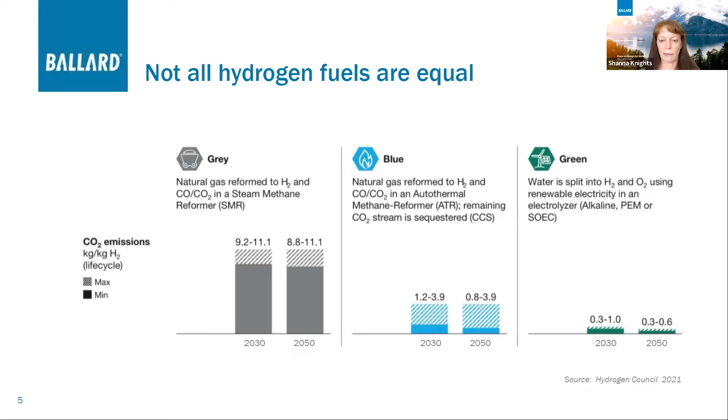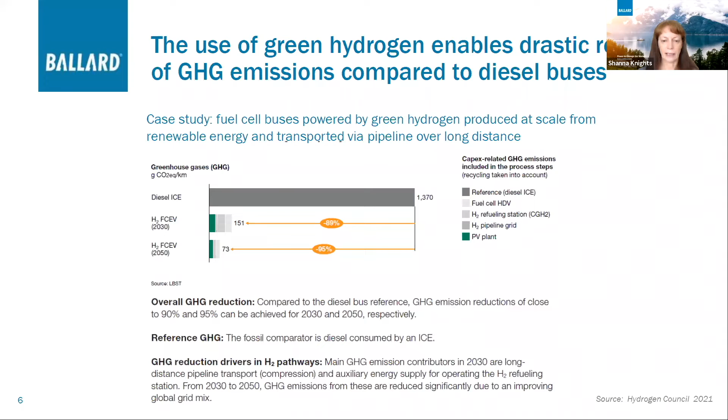From 2030 to 2050, the impacts go down further, and that's based on some expected improvements in the compressor to move the hydrogen through the pipeline and some auxiliary energy supply for operating the hydrogen refueling station.

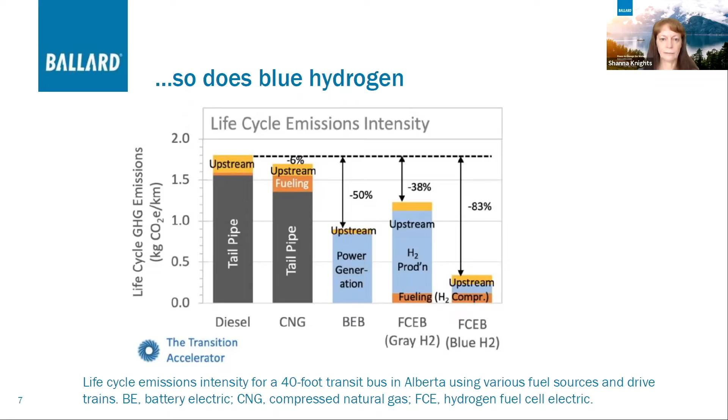Longer term, we hope that the grids can be cleaned up and that we'll have both battery electric buses and fuel cell buses have the significant impact that we all know that we need, and both will have drastic reduction. So just looking a little bit more at the complete life cycle.

We want to look at not only the operational phase of the bus that I've just been talking about, but the emissions generated during the production of the vehicle, including the fuel cell engine and batteries, and the end of life. What happens to it after it's operated?

So we call these different scopes of emissions. In producing your fuel cells or your battery, you have your scope 3, which is indirect greenhouse gas emissions that result from firms' operations when they're producing those. We have the operational emissions, which includes emissions for transmission from the grid, for producing your hydrogen, for producing your electricity, and no scope 1 emissions from actually operating your vehicle.

And end of life, again, it's scope 3, and here again it's indirect, but it's what happens to the vehicle, what happens to the engine after it's been operating and it's no longer producing enough power. Do you just have to throw those into the waste, or can they be recycled or reclaimed?

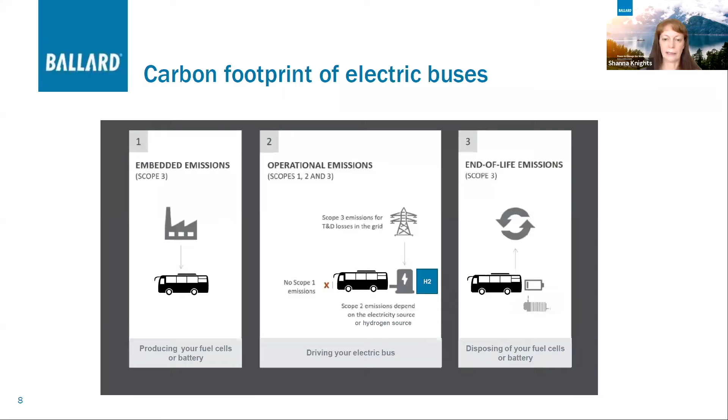Ballard makes fuel cell power units. We've gone into a lot of detail, and this is something we're going to be focusing on a lot, making sure that we know what the environmental impact is of our fuel cell engine and how we influence and reduce it.

Most of the components within a fuel cell stack are either graphite materials, so carbons, or metals, basic metals like aluminum, steel, and precious metal in the form of platinum. There's very little range of more exotic metals and materials like you'd find in batteries, for example, so it's relatively simple in terms of the materials produced.

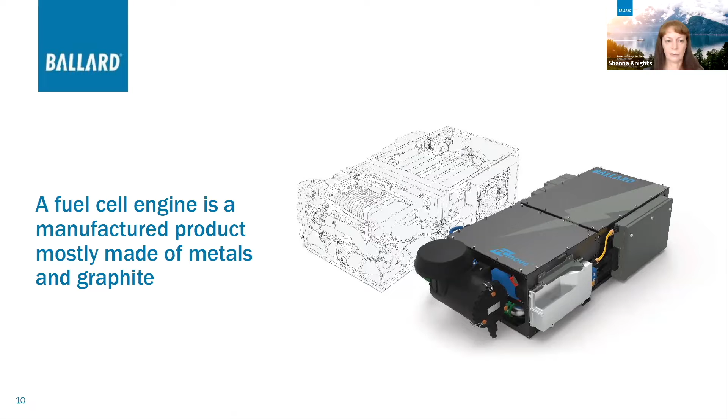What we've been working on over the past couple of years is really making sure we understand our greenhouse gas footprint of our products. We've done life cycle analysis from cradle to gate, from the production of our products until we ship it out. That includes looking at extraction and processing of raw materials, manufacturing and assembly of components, upstream transport, and manufacturing and assembly of the power module at Ballard's facilities.

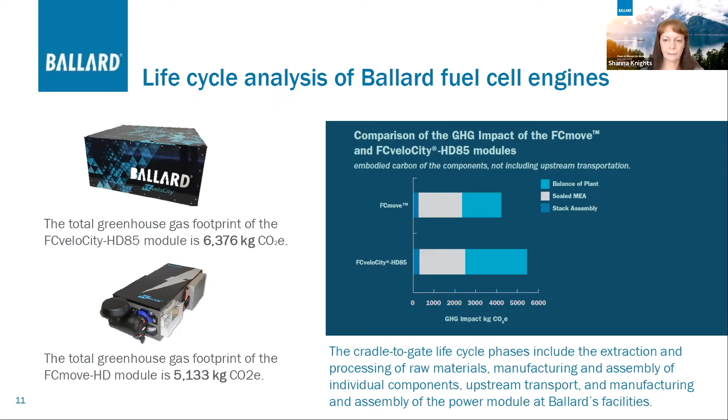Platinum is a mined material, and the mining of it currently has a significant greenhouse gas impact, but mines are starting to look at how they can reduce their impact, implementing the use of fuel cells or battery vehicles. Additionally, this analysis assumes no recycled platinum. We do recycle our platinum, and eventually we have to look at including that in our analysis, but for this first run we didn't include it, so that will reduce the platinum impact as well. When we make decisions on where to source our platinum, we can start to look at its greenhouse gas impact, and whether it's being mined or recycled sustainably.

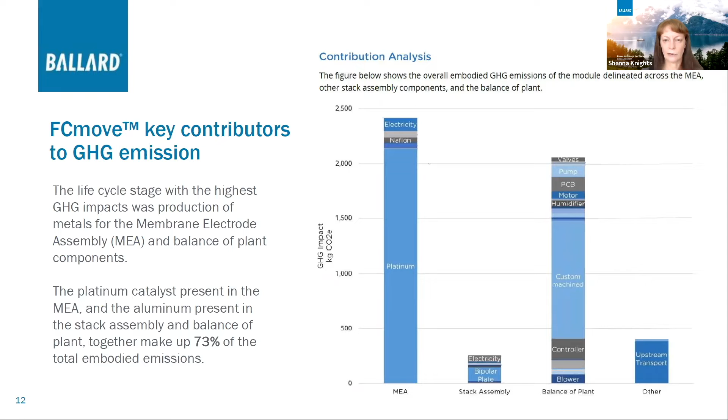Similarly with the balance of plant, the largest component making up the emissions is the use of aluminum, and again this analysis assumes it's raw or first-use aluminum.

So that was looking at the beginning of life, but now we want to look at the end of life. When the power fuel cell stack reaches end of life, we can recycle about 95% of the platinum catalyst. Here we're looking at how much we can refurbish our fuel cell stacks, doing a cradle to grave assessment. We talked about cradle to gate operation, but looking at the whole thing is a cradle to grave assessment. At Ballard, we refurbish our fuel cell stacks when they reach their end of life, which typically for something like a bus would be 25,000 hours or more.

We use graphite bipolar plates, which are very durable. When the stack reaches its end of life, so it's not producing enough power anymore, those plates are still able to be reused. So we can refurbish a stack, which means remove the MEAs. We send those MEAs out to be reclaimed for the platinum, and we can put new MEAs in and reuse those plates several times. We reuse the components as much as possible, and then those new stacks are as good as new and shipped back to a customer.

This provides a very significant benefit for reducing our greenhouse gas emissions for fuel cells. I don't think batteries can do something similar at this point. We've been doing that for a number of years now, and we refurbish thousands of fuel cell stacks every year.

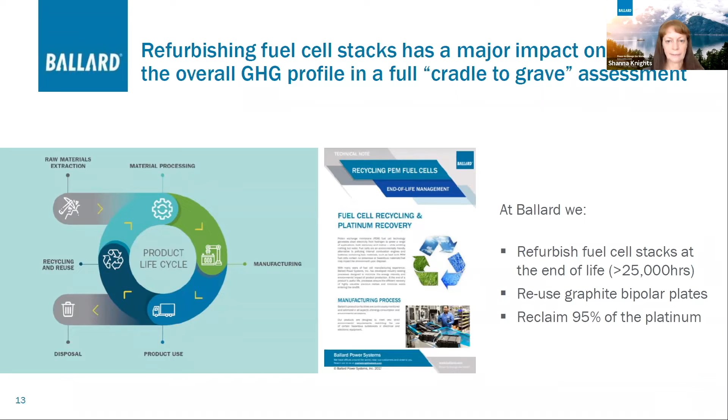Now looking at comparing the greenhouse gas impact of fuel cell systems for production, what would actually be on a typical transit bus. These numbers compare a typical fuel cell powertrain, which includes a battery as well—an 85 kilowatt fuel cell and 50 kilowatt hour battery for the fuel cell bus—compared with a 350 kilowatt hour battery for a battery electric bus, which are about equivalent. It shows that there's 75% less emissions to produce the fuel cell powertrain from cradle to gate.

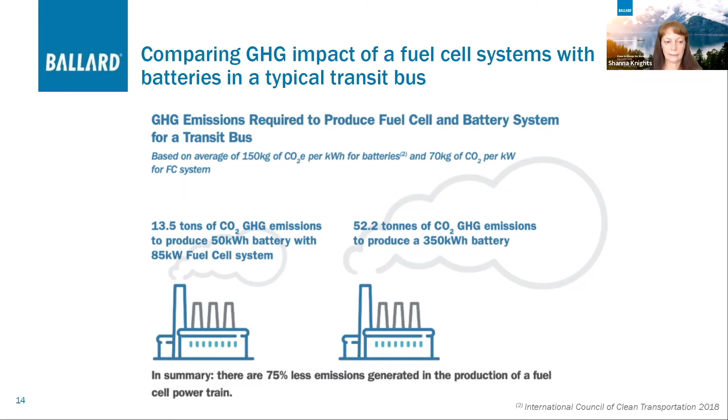At Ballard, we consider sustainability to be an integral part of all that we do. Our products power fuel cell electric vehicles with a lower lifetime environmental impact than any other technology, and deliver true zero emission mobility when fueled by green hydrogen. We have a strong commitment to the environment, as our mission is to deliver fuel cell power for a sustainable planet. We're guided by the United Nations Sustainable Development Goals, and we seek to improve our performance in affordable and clean energy, industry, innovation and infrastructure, responsible consumption and production, and climate action. We're delivering sustainable zero emission fuel cell power, reducing our operation and products' carbon footprint, and we have our own internal goal to become carbon neutral in our own operations by 2030.

So next slide. And I just want to say thank you, and I'd be happy to answer any questions.

Thank you so much, Shanna. Very insightful, and maybe a bit of a different perspective on Ballard fuel cells. Besides the regular knowledge that you avail to us, a part of me is also tempted to get into a passionate discussion about mining rights in the Arctic, but I guess it's not the topic of today.

If we were to stick to the topic of today, starting off with a bit of a discussion on emissions from the fuel supply side. One of the first audience questions is: where are the greenhouse gases coming from if hydrogen's produced from solar PV, in one of the cases you mentioned earlier? If you can shed some light on that, that'd be great.